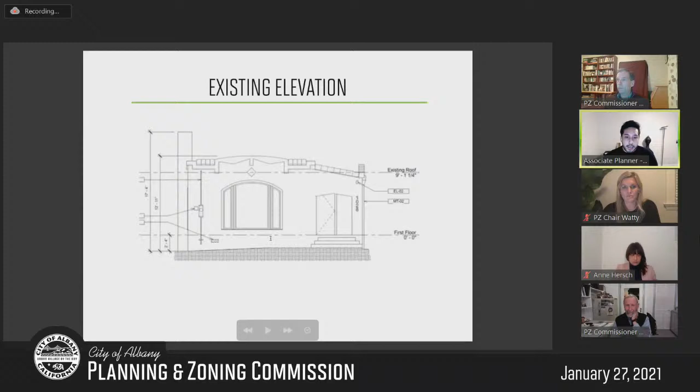And here's the existing elevation of the home. And here's what's proposed.

Exceptional design: projects which exceed a 0.45 FAR are subject to exceptional design as reviewed by the Planning and Zoning Commission. Exceptional design treatments for this project include a modern exterior design on the 2-level addition, which includes fiber cement vertical and horizontal lap siding on the exterior of the addition, fiberglass casement windows proposed throughout the addition, a new ground floor deck, and a new rooftop deck on top of the second story addition with access via a new spiral staircase on the exterior of the home as well, wall mounted LED sconces, and landscaping improvements.

Parking: there's an existing detached single car garage that is proposed to remain. 2 off-street parking spaces are provided in the existing detached garage and driveway. No additional off-street parking spaces are required under this project scope.

Staff has not received any correspondence regarding this project proposal, and the project is categorically exempt from CEQA per section 15303. Recommendation: staff recommends that the Planning and Zoning Commission review and approve the proposed project subject to the findings and conditions of approval. And with that, staff is happy to answer any questions. Thank you.

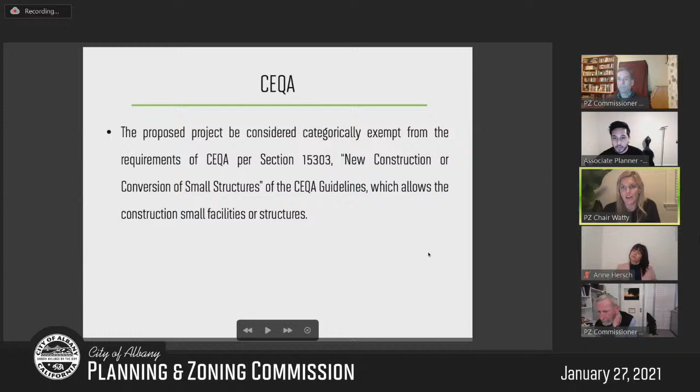Thanks, Chris. Why don't we first go ahead, are there any questions for staff before we open it up for public comment? I have a question. Sure. Why don't we go Commissioner McLeod and then we'll go Commissioner Pilch.

Okay, just a quick question regarding roof decks. Can you refresh our memory on the requirements or restrictions? What are the limitations on the roof? Just tell me that the roof deck complies to all existing regulations.

Yes, the roof decks, we leave them to the commission to evaluate on a case-by-case basis. Effectively, the only standard is that if it fits within the height and building envelope, no setback encroachments, they're typically, if they comply with that, then they're satisfactory. The commission, of course, has discretion in their review of what's proposed to require modifications if you so choose.

Okay. Commissioner Pilch? I'm sorry, and I might have missed it as I was looking at my plans, but are we having a presentation by the applicant as well, or no? Yes, the applicant wishes to conduct a brief presentation. Yeah, so once we're done with staff questions for staff, we'll open it up to the sponsor and then for public comment.

Okay, the only question I have is why the rebuild of the bottom deck? But that if staff doesn't know, I can ask that of the applicant.

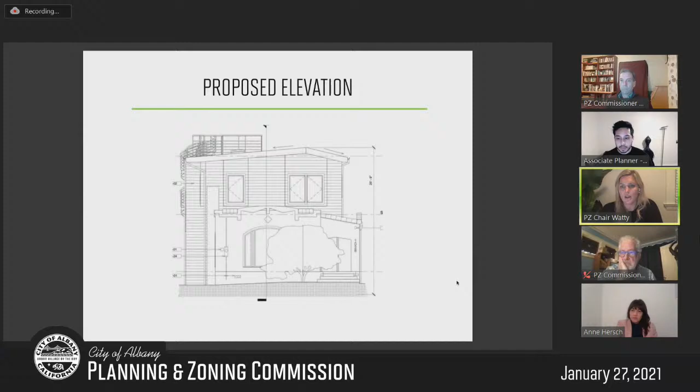Okay, great. Thanks for that clarification. Any other questions for staff before we have a presentation from the sponsor? All right, with that, why don't we go ahead and have the project applicant give their presentation.

Okay. Tarry, you can now speak. I'm going to bring up your supplemental documentation and share the screen as well. Thank you. Can you guys see us, or just the screen? It's just the audio and the screen. Okay, yes, got it. Okay, first off, I want to thank everyone for taking the time out and doing the review for us and spending this evening, a few minutes. Let's see, I think I would like to just skip towards the back, Christopher, and just go to the supporting documents.

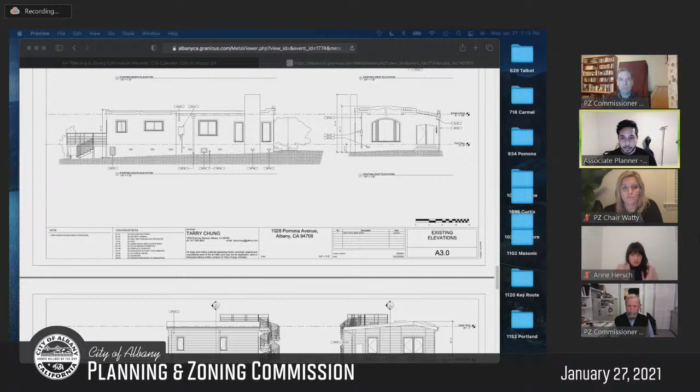Is this the page you want with the 3D renders? Maybe just to begin with the color renderings at the back. Sure, thank you. This is all we have in front of us. So I have this watercolor rendering and then the 3D rendering at the rear. Oh, how interesting, I see page A3.0. Yeah Chris, we just see the elevations right now. Oh, okay, huh. One moment then.

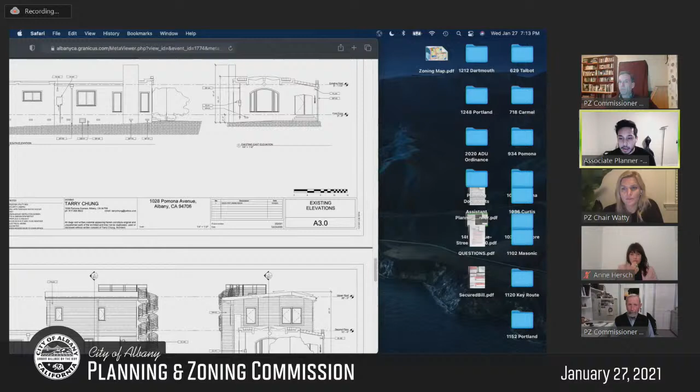Sorry. So when you do bring it up, the supporting documents basically attempt to show the massing of the second floor addition on top of the existing home. I think that's just fine against the context of the block. Not necessarily this color, I do admit different screen colors, different color palettes on different software, fail me. But this is basically how our addition would sit in the context of our neighbors. The upper image shows the street view, and the lower image shows the view from the backyard, and there it shows much better the way the rooftop deck would sit.

Is it possible to scroll one more page ahead? Right, and so these two side by side, so that's okay. The one on the right is just yet another view from the street level as you would walk along the sidewalk in front of our house. That's basically what you would see. It's set back in the second half of the house, essentially, so it's not right up against the front.

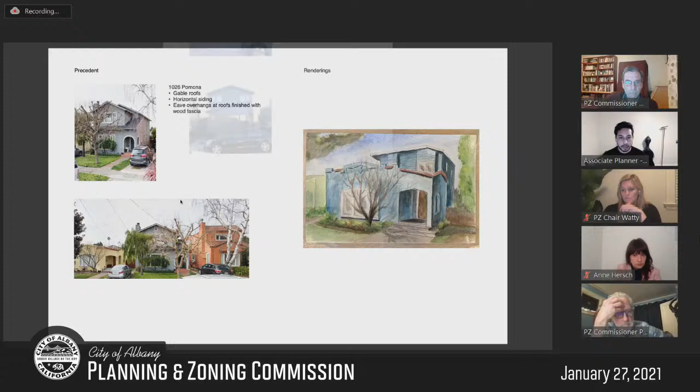And then on the left side, the upper photo shows 1026, our immediate neighbor to the north, or to our right when you're looking at our house. And then next to them is the orange house, that's also our neighbor, and those two were done in the late 80s. So ours is going to be set back from, I guess, their facades. If you go one more ahead, that basically shows another house down the street from us further south, and we were kind of taking cues. This one had a really good color, which I can see is kind of washed out on the screen at this point, on my screen anyways. It's a bluish purplish color, which does a lot of things depending on the atmosphere, the gable roof as well as the offset roof. And those were the kind of cues I was taking from.

I could answer the question about the relief at the windows, if that's okay. I totally agree with changing the window details to allow the 2-inch relief. That is part of the project approvals, I will do that. Yeah, just the most important thing to me was maybe using the fiberglass technology to provide greater interior insulation and modulation with the environment. That was the only thing.

And then I think as far as there was an item about the height issue as far as the roof is concerned, Christopher, if you go back to maybe the last page. Yeah, so the top rail is what is hitting the 28 feet. In fact, in these ones, I had already cranked down the house by another foot, and so it falls below the 28-foot envelope. But essentially the peak of the roof, that ridge, is well below the 28, and it's the rails, which I realize look very dark in the image because of the pen weight and the graphic quality, but essentially the guardrail would be very lacy in appearance.

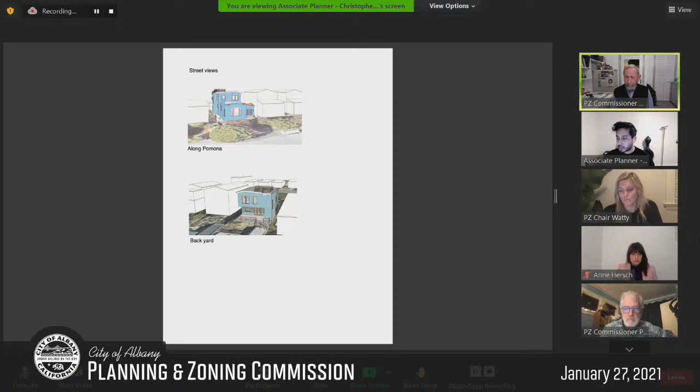At the rooftop deck, I'm hoping to install pickets with cables so that it becomes as airy and light as possible. As for the spiral stairs, I did not include it in the backyard image because graphically it was just so heavy and black-lined, but it would essentially be matte stainless steel as well, and very lacy.

Okay, good. There was one other question about why the rebuild of the bottom deck. Yes. So when we first moved in, in the fall of 2016, it was explained to us that the deck needed replacing. We've been hoping to do this addition for so long and just saving up money, and didn't do anything. We've been really careful about maintaining it as best we could, and now it really has to go.

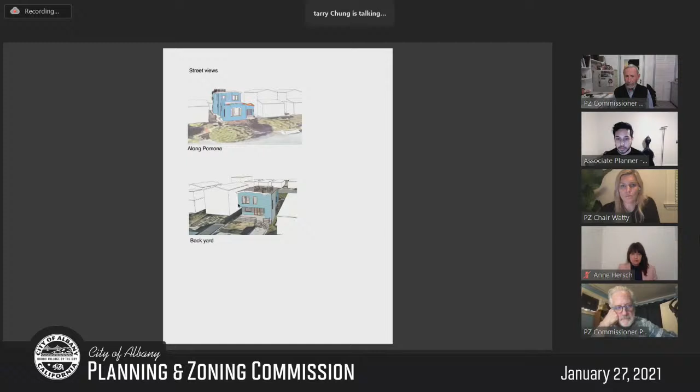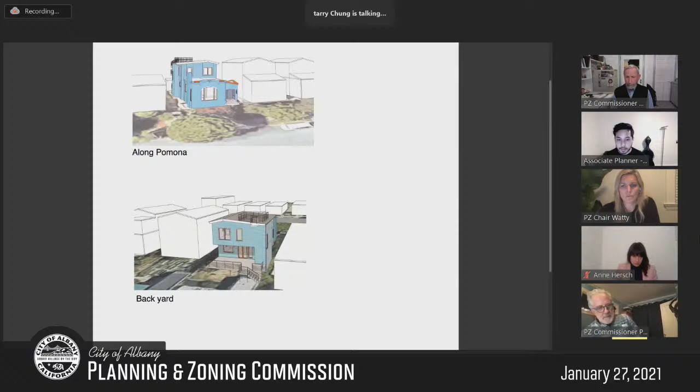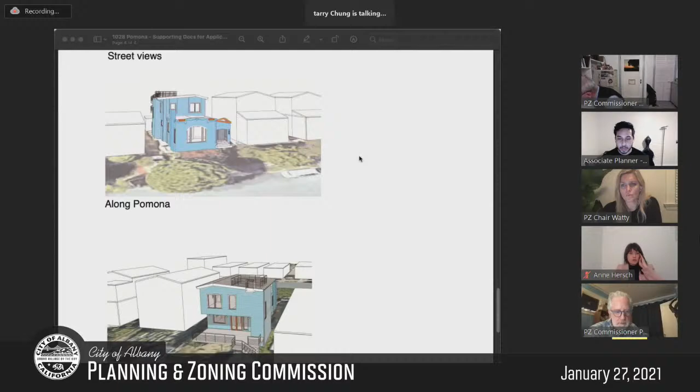But it does look like you'll be removing a tree in the process. Because the current deck takes a notch around the tree, I don't know if it's possible to bring up the site plan, and it's not allowing a flattened, orthogonal area there. It is our hope to replant a different tree, although I will have to consult my neighbors. I will be mindful of that.

We were just surprised that our neighbors a few doors down are having a rodent issue, attracted by fruits and things like that. So we would not want to continue causing extra problems. It is our hope to replant another tree, but in a different position—I think I located one at the northwest corner in the proposed site plan.

Okay, no, it's fair enough. You would like to have a bigger rectangular deck. Yeah, it's more usable. Understandable. Right.

Staff, I wonder if it's possible, when we have applicants, that we bring them in temporarily as panelists so we can actually see them? That would be something we'd have to confer with our city clerk on—she's set parameters around who gets upgraded to panelist status, but that's something we can discuss with her outside of the meeting. Oh, okay. Yeah, I'll email you about that too.

Thanks, I don't have any more questions. Oh, except for staff—I suppose these additional documents, were they sent to us yet? They haven't been sent, but they can be. They were provided to us by the applicant as part of her presentation to the commission this evening. I see, yeah, I would love to get those. Okay.

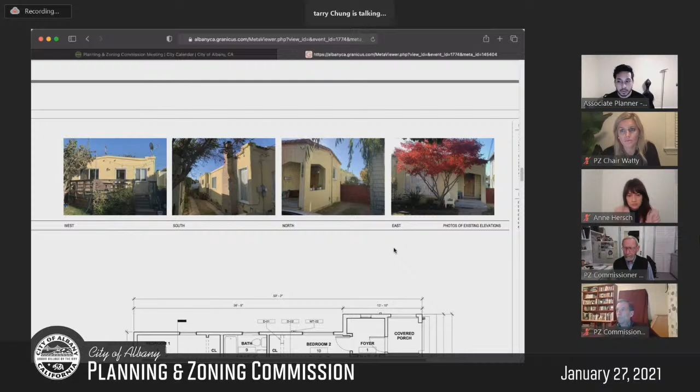Yeah, and you haven't decided on a color yet. We do very much appreciate—I've been envying the color up the street from us, mid-block on the east side on Pomona, between Solano and Marin. It's a lovely blue color which I failed to replicate digitally. They have it done and it looks so nice. I even want to leave a note for the homeowner to ask what they used. Okay, well, that's good. Thank you.

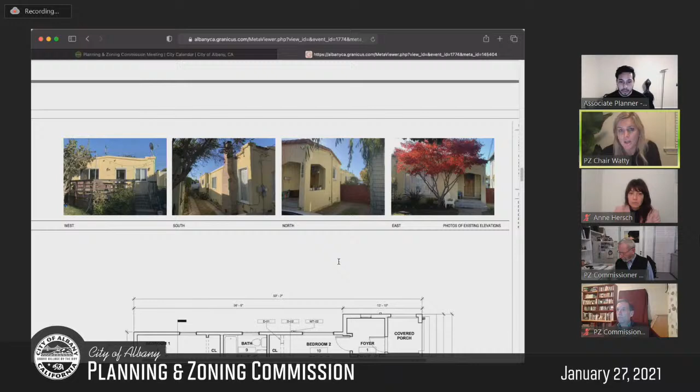I had a couple of questions for the architect before we move to public comment. Two comments in particular. First, looking at this addition on an existing Spanish Revival style house, one of the standards we have to meet tonight for approval, especially for those seeking exceptional design, is that from the design guidelines, the addition should either be well integrated into the existing architecture so it looks original, or well-designed, well-proportioned, and complementary.

I'm wondering if you can talk through your choice of Hardie board wood siding versus the plaster of the original house, the fiberglass windows versus wood windows, the contemporary roof form, no terracotta detailing—how you feel you meet the standard of it being well-proportioned and complementary, given it's a dramatically different architectural style than the existing home.

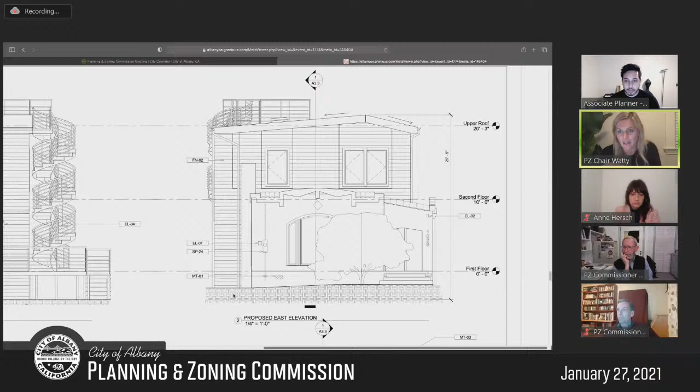I'll get both questions out so you can answer together. Second, for projects with exceptional design, we were also supposed to include a landscape plan. Although there's a drawing in the plan showing some landscaping, it doesn't really look like a proper landscape plan—it looks like it's probably just replicating a couple of plants already on site. So I was hoping you could talk through your plan on the landscaping front. Did you engage a landscape architect? If you can walk through the vision for the landscape plan you've provided to date, that would be helpful. Thank you.

To address the style issue, when we first moved in in fall of 2016, our neighbors down the street—I had shown their house, the blue house, I think 1054 or 46 or something like that—with the gable roof at the second level, and the 1042 Pomona gable roof on the second level, and then the asymmetrical roof at the lower level. I liked very much the asymmetrical roof. And looking at my neighbor directly next to us, they have a gable roof, so I kind of put those two together. The reason why it's sitting on top, and I realize it may be a departure from the Spanish Revival...

So in thinking about that, while I do very much appreciate the Spanish Revival style, ever since we've been thinking about this, especially within the last year, we've been walking around the neighborhood looking at what everybody has been doing. I did not feel comfortable replicating something that was done 100 years ago. My house was built in, I think, 1926 or 1928—it's going on 100 years. I was questioning whether, by the time I pop on the gable roof, and on the Spanish Revival houses around the neighborhood, when they have a gable roof they may finish with Spanish terracotta clay barrel tile on the edge trim, or maybe in section, so you see the barrel in section. But then I began to question whether Spanish Revival style really came down to just having clay tiles or some ornamental trim, and if that's all it means, if that's just copying details. Being in the 21st century, is that the proper way to respect Spanish Revival?

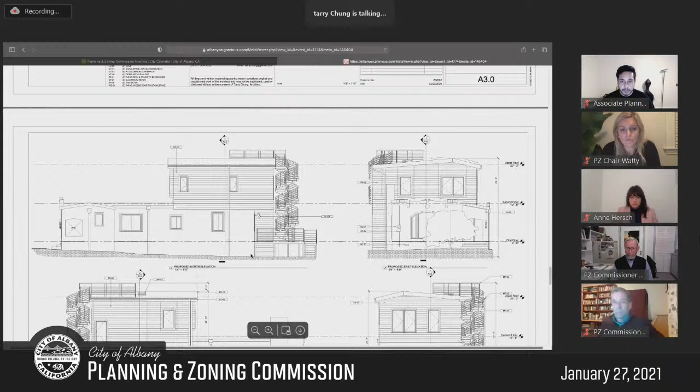As far as the landscape plan is concerned, there's not as much done on the front. We have some plants already there, including a mature maple tree that's been there for years. I'm not an arborist, but it's very nice. We're installing artificial grass in the backyard for maintenance and drought tolerance purposes. We currently have a couple of bougainvillea beyond the railing which will probably be destroyed, so we'll replant that. I've also shown some vines where it says SP-24 right under there.

It would be nice to have crawl vines right there. The tree, I realize, does not have a tag next to it. What does have a tag is next to SP45 - there's an existing rosemary bush that bees love coming to, so we have to figure out what to do, whether replanting it elsewhere or putting in a different bee-attracting plant. The main idea isn't a fancy driveway, but we know we need to do something, maybe installing permeable pavers down the driveway, which needs to be refreshed - it's pretty broken up at this point. We'll also install artificial grass to align with drought tolerant initiatives.

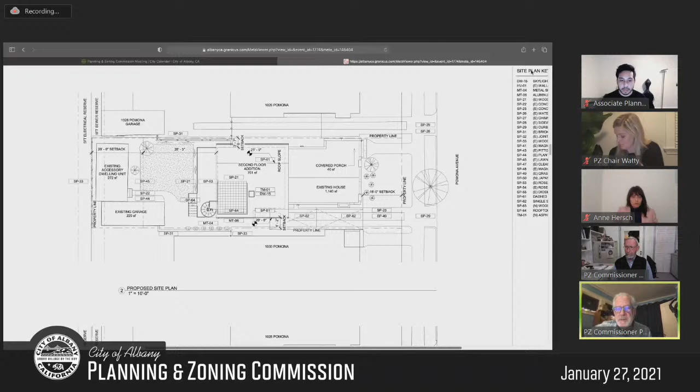I forgot, when I was looking at the plans, I noticed - oh never mind, I don't want to ask that question anymore. But I do want to ask about the windows now that you mention it. When you say fiberglass windows, can you tell me more about the composition? For example, clad windows are wood windows with an aluminum clad on the outside for weather protection. Are the fiberglass windows you speak of all fiberglass, but made to look like wood? I know some fiberglass extrusions have a little fake wood texture. What's your knowledge of these windows and what's your intention?

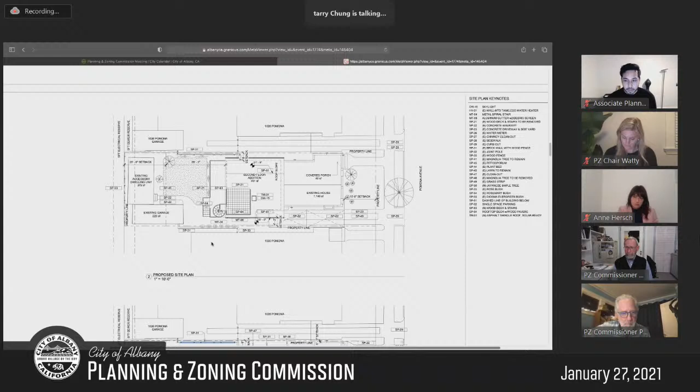Christopher, would it be okay to go to A4.1? That would help me out. Tarry, are you using Marvin Integrity? Is that the line you're using? It's not Integrity, I think it's under Marvin Modern. Sorry, what again Tarry? A4.1, which is a door and window schedule showing the jamb and header details. Got it, one moment.

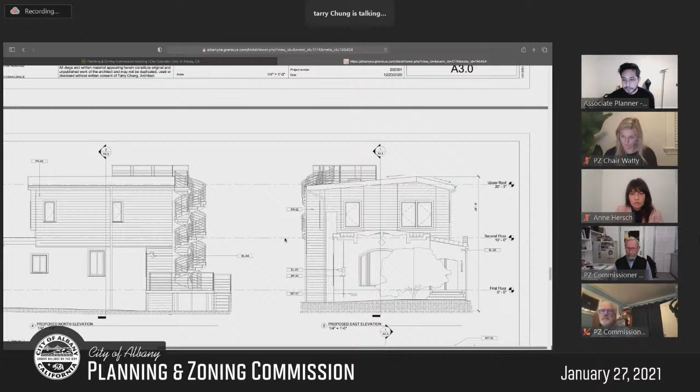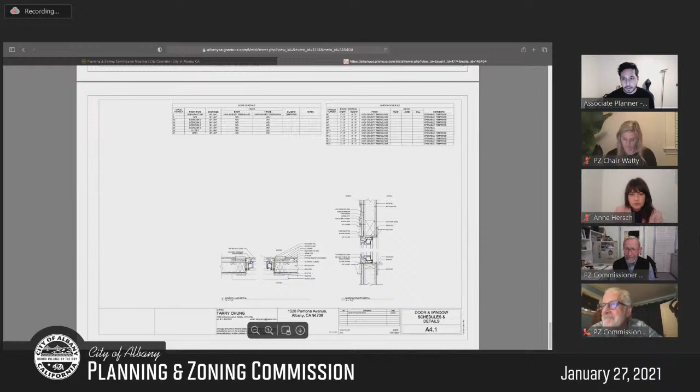I'm all about creating shadow lines and relief, so these windows will be set back where they belong. Can we zoom in? Thank you, Christopher. I don't have a good copy of the text in front of me, so I'll depend on reading off the screen, I apologize. So essentially, the fiberglass - if you - I can see half of that. I don't know if everyone else can see the details.

Okay, so the fiberglass assembly is essentially the way the extrusions are fabricated in the factory. Would it be a requirement to have wood trim? No, not necessarily, I don't know. I don't think so, I'm just wondering, since there's such a difference in styles here, I want to know as much as possible about the style and look of the new addition, and that's why I ask. Oh, you know, the troubling thing - not that I want to replicate this - is I have vinyl windows unfortunately on my lower level, my first level, my current level. So that's why they'd be white, because the current windows are white and I need them to all talk to each other nicely.